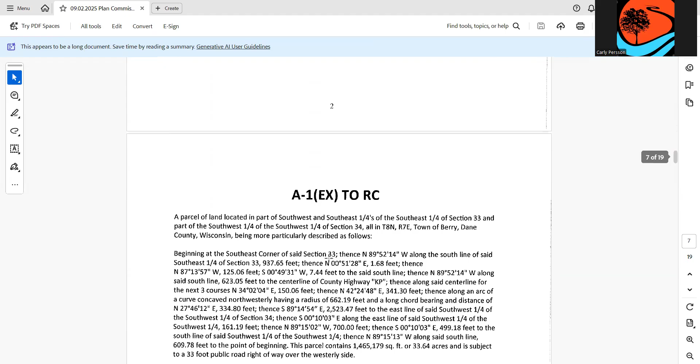Second item: discussion and possible action regarding certified survey map drafts, section 33 and 34, Town of Berry. Yep, I'll take this one.

So this is a CSM that falls into our extraterritorial jurisdiction. I'll show you a map that shows where it is in relation to the village. So basically what this is doing, John Brooks, a Town of Berry resident, is splitting off his home. He'll have 37.63 acres and is going to sell the remaining 33.64 acres to the Ice Age Trail Alliance. His parcels are on the northwest side of town for the most part. So right in here.

So these are the two parcels we're talking about. This is KP, and Shield Road is right here. I'll go back to the CSM itself. Basically he's looking to divide that into two different lots. This was already approved by the Town of Berry. So he's going to keep one of the lots with his house on it, and sell the remaining lot to the Ice Age Trail Alliance.

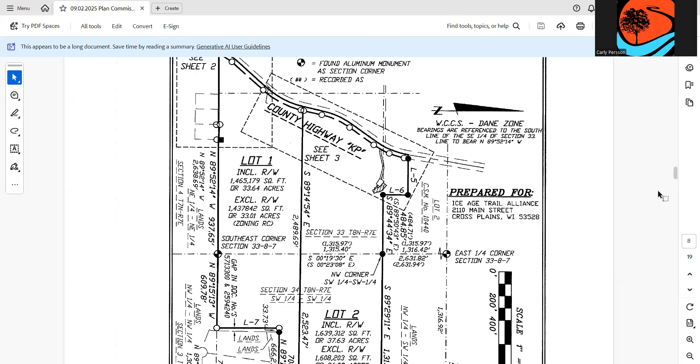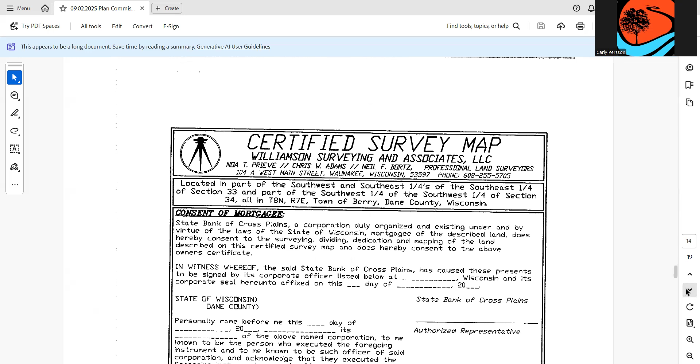All right, we're at discussion regarding Marchstone Water Tower / water reservoir. Why don't we have Brian and is it Kyle or Jeff want to come up?

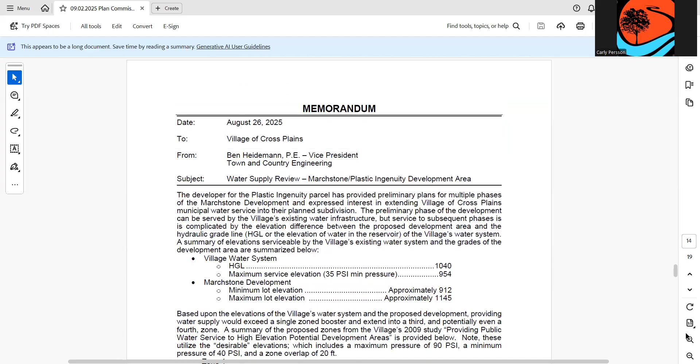Sure, just a lot. And then, chatting with developers, they had some questions, so we made up another summary cost sheet of some of the options I was talking about. This is a single page with some photographs of what the options could look like.

So, Jay, unless you tell me different, I think what I'll do is walk through the memo, kind of like we did the other day, and present some of the different options that are available to provide water service there. I'm going to try and keep it fairly high level.

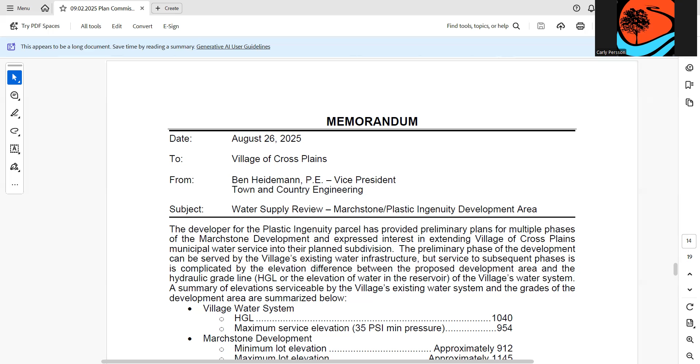Going through the memo briefly, right now the highest elevation you can serve is 954. So any house with a meter higher than 954 is going to be too close in elevation to that tank. The pressure won't be enough to meet code. You do have some homes in the northeast portion of the village that pre-existed that part of the code and have survived with not great pressure.

If they had a two-story house and tried to do two loads of laundry with a couple teenagers around, it'd be pretty tricky to get good pressure out of that shower head.

You can see the next set of figures is where Marchstone, the proposed development, exists. We're talking about the entire development, not just phase 1. For reference, phase 1 is well within your existing service area—that's the one recently approved at preliminary plat. But the next phases get close to 1145 feet above sea level, well in excess of your current system's ability to serve it.

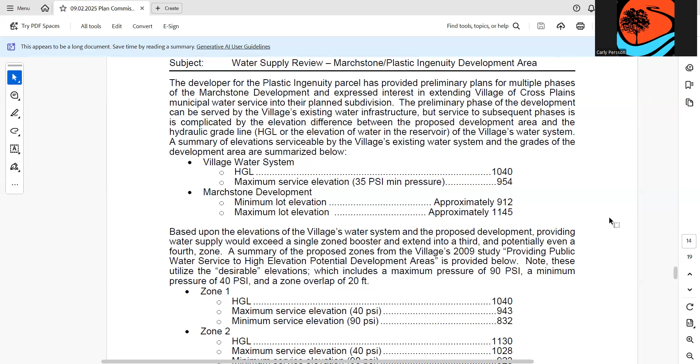The other item we noted when looking at options to serve Marchstone specifically were that, in addition to your zone 1, we'll call it your current zone, there's a decent amount of hillside itself, just literally the sides of hills, that takes up a good portion of what we would describe as zone 2.

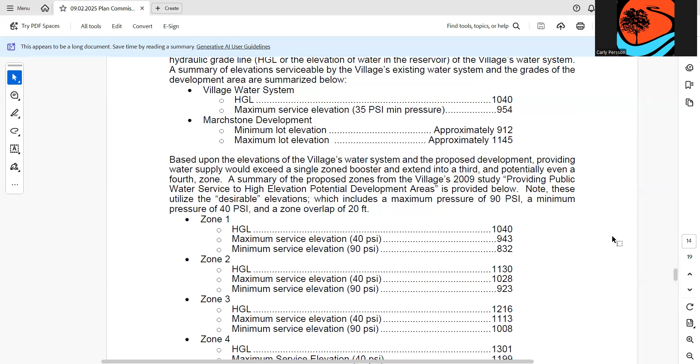When laying out water systems, we prefer a blank slate. We would prefer that zone 1 would be connected to zone 2, and then if you got complaints about low pressure in one zone, you can just turn some valves and now they're on zone 2, and they got really good pressure. They could share reservoirs. They would each have a source of water.

The issue at hand tonight is similar to what some of you may recall from the Sundance property, in that the homes at the very top are so high up. We kind of started looking at, do we want to skip a zone? There's some value skipping a zone or overlapping 2 zones because of the unlikelihood that a lot of houses would be needed in that hillside zone.

So you got the valley, the hillsides themselves, and then at the top would be the 3rd zone, and then at the very tippy top would be a fourth.

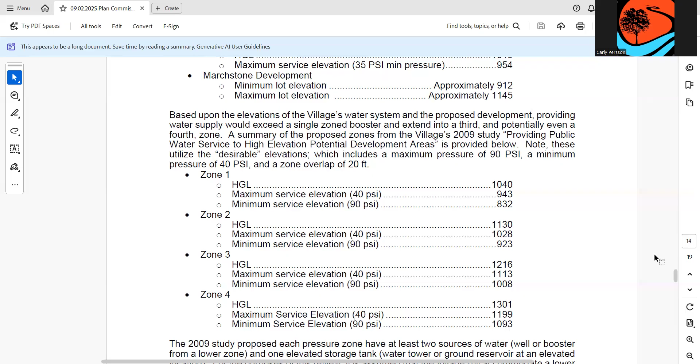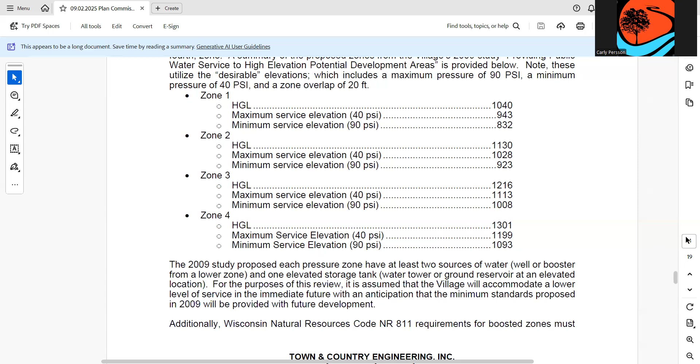The old studies and the old discussions with this group or with the board often centered around a couple ground rules that we would always recommend, and that's the last paragraph on the screen right now, is that ideally, each zone would have 2 sources of water and 1 tank. That gets fairly expensive, and that is not a code requirement.

It's something that engineers worry about is, if a disaster and another disaster happens in 2 consecutive days, getting water to and from those zones could be tricky, but it's not code.

So for this memo, we assume that the immediate need would be to serve Marchstone, and that some future need may get the village to a point where you have enough houses on the separate zone that the community would want to bring in that second source of water.

So when we say need, we're trying to use the word need to mean that's what code requires. Recommend is something at some point in the future, when the community feels like there's enough houses - and the definition of enough is subjective - but enough houses that you want to have a second source of water up there, you could do that once your system has grown.

As with any quantum leap, like a booster station for water or a sewage pumping station for sewer, that first home, you still need the same stuff, whether it's 1 home or 100 homes. And the trick from the developer standpoint, from the community standpoint, is to balance that so that first house doesn't need to cost $1 million.

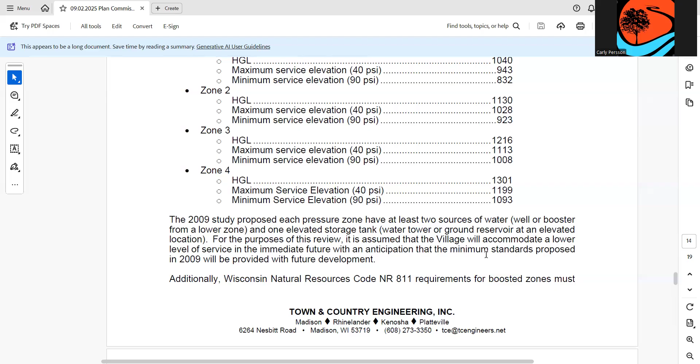Load the infrastructure. So with that, we looked at a good half dozen of options relative to the code, which I won't bore you with at the moment. There are some overlapping sections of code, so you fairly quickly end up with kind of a tic-tac-toe board of matrices that gives you a bunch of options. And we've distilled that down into about 2.5 options for the village and developer to consider.

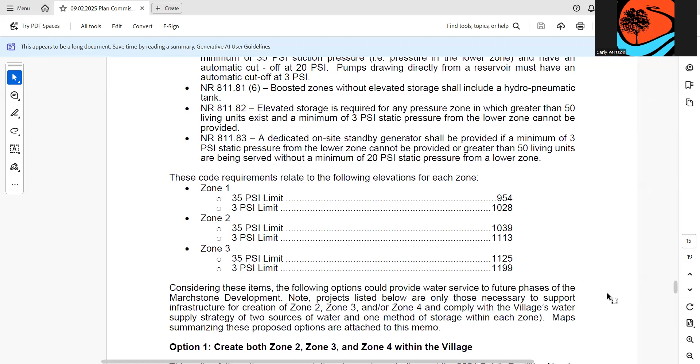Now I'll go into those. Option 1 would be a straight up do zone 2. You've already got zone 1. You'll see that second zone, a third zone, and a fourth zone, to cover all of these potential elevations.

That bulleted list and top option on my single page handout is what would be required. So you'd be looking at a booster station, which is a little house, a small building, a large ground reservoir, another booster station to go from zone 2 to 3. Then an elevated tower - this is a ball on a stick tower - with yet another booster station to go from zone 3 to 4.

And if money was infinite and there were no other considerations, this would be the most technically robust and most future flexibility to provide to a community. It also comes with a fairly heavy price tag - in very, very rough numbers, about $13.5 million.

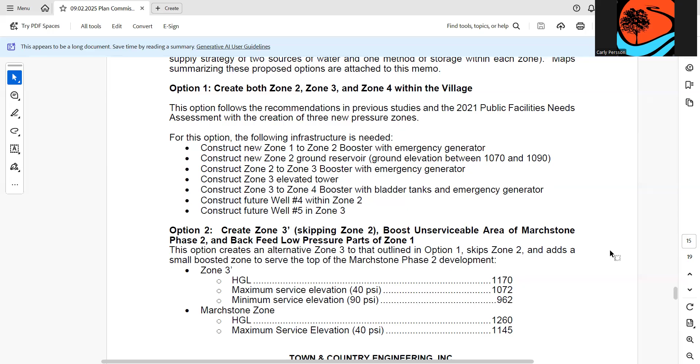The second option would be to look at skipping zone 2. And again, zone 2 would - in a community that just got gentle hills - make a lot of sense to have a zone two, but here, because your hills are so steep, and at the edge of your zone one, there's not a lot of developable land. In those, you do have your hillside regulation requirements. So skipping zone two, you went straight to zone three.

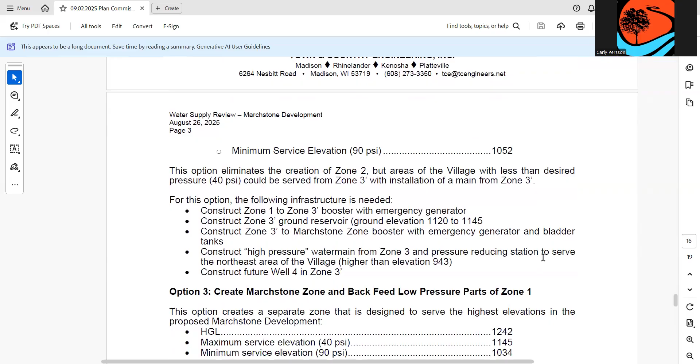That would involve a bit less infrastructure. We'd be back to 2 booster stations. That's one from your current village system to get up to the top of the hill, essentially, and to fill a ground reservoir near the top of the hill, so very similar to what you have now. And that second booster station to feed the homes that are right on that same level as the ground reservoir.

We want to be able to provide a solid 35 PSI at ground level, which ends up being 40 PSI in the basement, and allows you to take a shower on the second floor while having water, just for gross purposes.

The nice things about that option are slightly less cost. It does have a ground reservoir which matches what we have now. Some folks may not even know we have 2 of them in town.

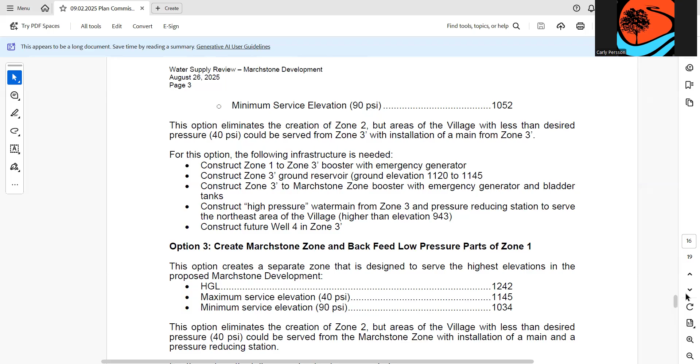The third one would be somewhat less costly, and the way we save costs there would be to eliminate that second booster station. So instead of a ground reservoir with pumps right next to it to provide that pressure to get to the second floor of houses, you can go with a traditional elevated tank, a sphere on a stick, a ball on a stick.

That would also be at the top elevation, but it would be tall enough to create that elevation difference from the ball of water to the second floor of a house, to provide that pressure.

That is slightly less dependent on electricity, and once the water's been pumped up, those are sized to provide at least 1 day's heavy maximum day use for that service area.

In all of these cases, the reservoirs would be initially sized to handle the immediate needs, Marchstone, and then upsized to handle both any potential growth they may want to accommodate, as well as some existing needs within your current system.

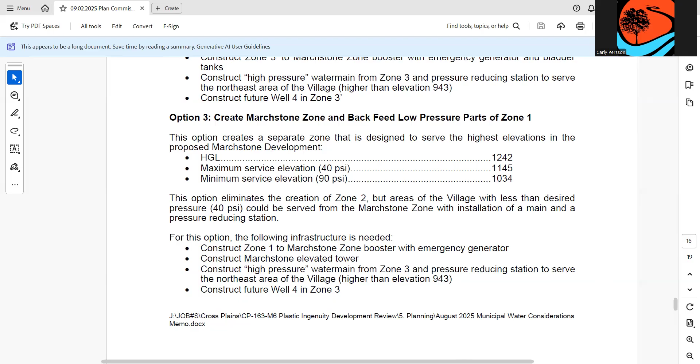The other item I should call out while we're looking at the asterisks says includes high pressure water main. Like, go back, or go down we should say, to the big map. Either this way?

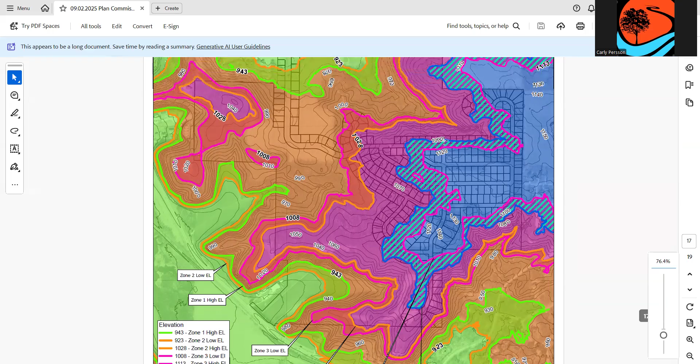Some of you may have recalled that one of the comments on the preliminary plat was that the village should request of the developer, which he's provided, an easement along the edge of phase 1. That's specifically to allow the village, as a convenience, to run a water pipe, a special dedicated water pipe from the blue/purple area across the yellow-green area to the north of Airport Road to give better pressure to those folks on Airport Road that don't quite have it now. So those costs are embedded in what you see here. Those have not been viewed as a developer thing because it just helps the current situation.

That's that single star, I think that was one of my questions, they should just answer. So I have friends on King Arthur Court, and they have to get their own booster half the time because of that. So if we discuss that, would it eliminate that, would they not need it anymore, correct?

What Julie's referring to is, if anyone's ever lived out of town where you got a well, a pressure tank in the basement, that's how those homes have a second floor tower. They have a pressure booster in the basement, that's kind of what they look like, a little bigger. So they're not unheard of, but it's another thing to have. A lot of folks in that neighborhood have chosen to just install one so they can overcome some of those pressure deficiencies just for normal daily use.

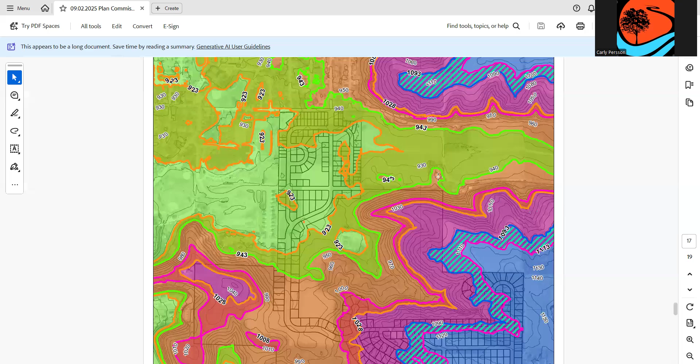So again, the option that skips zone 2 - just looking at it, very flat here, there's 15 lots or so that show up in zone 2. And that's what the clubhouse would be as well, and everything there. Certainly potentially, yeah, those folks would either need that type of private booster in their basements. Alternatively, the clubhouse, as an example, because there would be a storage source up above, can utilize the pressure reducing valve - get the water from the same spot, you just reduce the pressure on purpose right before entry.

Can you install something like that in individual homes as well, pressure reducing? Oh yes, absolutely - that's fairly common.

This is off the wall, but if you had to just guess, option 1 versus option 2, how many more years do you think it buys us? If we went with option one, would we ever have to do something more - versus if we went with option two? Do you think if we went with option two, within 5 years we'd have to do more anyways, or to get us to 10 years - or will option one get us to 10 years? Do you have a guess?

What's the damn good guess? I don't know that - you'd get to a point where you need that at 10. I'll admit that's just from what I've observed of the community in my 15 years or so working with you all. That's a lot of growth.

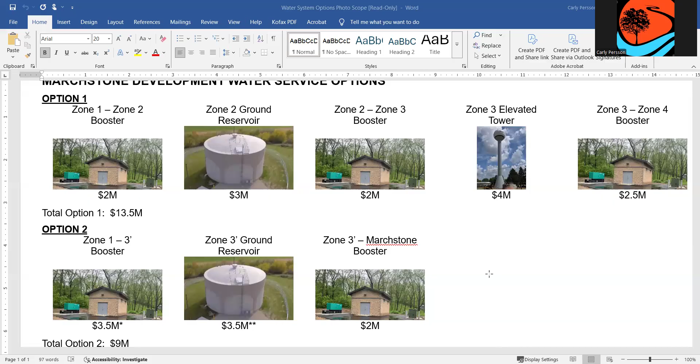I just think it would be hard to make our money back on that 6.5 million. You just don't know if there's enough growth at that elevation.

Brian, can you ask me a question? Sure. Well, if I take option 1, and I've got the same argument later - but if you looked at the last 2 items, 6.5 million from 13.5 equals 7 million. Right? If you just took that 6, after that it's 7 million. Why isn't this 7 million? Why isn't option 2 7 million with the same pieces?

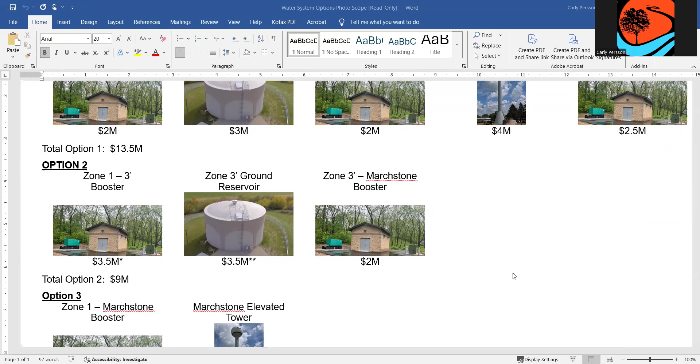Because option - this one, he's pointing to option 1 - I'll put it here. Okay. Option one provides continuous service all the way up to and including the top. Okay, this is Option one, two.

You'll notice this booster is more expensive than this booster. Yeah, okay. And that's because we need to boost further, so the finances reflect that. Yeah.

And to be fair, I like to overstress - these are like plus or minus $250,000, and I know I shouldn't be playing with $250,000, but there's a ton of options and choices to be made. That answers that - that's a good question.

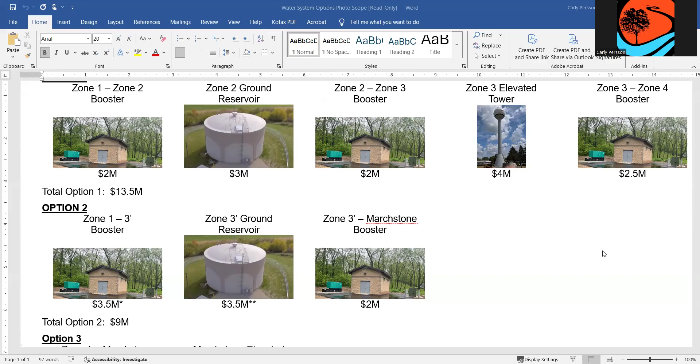To me, it seems like it's about costs and aesthetics - well, maybe that's this committee's perspective or my perspective. The aesthetics of the elevated tower is the issue.

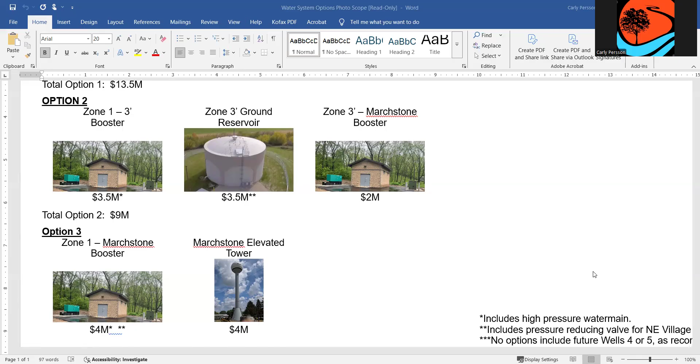What was the intent tonight, to look at options for approval? No, we're not looking for action tonight. This is to educate you guys and get your input on the situation. That's for the planning board and everybody else to discuss the findings. So it's more about seeing these three options, or is there another option you're thinking about, and looking at the pluses and minuses to get a feel for where you guys are on how you'd like to see the water part of it develop.

Jay, with all due respect, we're probably already a month or two behind. So I think the intent of this meeting was to get a little bit of clarity. That was my understanding.

Sure, we can - but when you say clarity, clarity of what? Well, I guess in our perfect world, the commission would basically make a recommendation that would be either option 2 or 3, if possible. Now, I'm not trying to step in where I shouldn't be, but our timeline's super tight to get phase 2 done, and I think we're already behind schedule. So if this is gonna get pushed back...

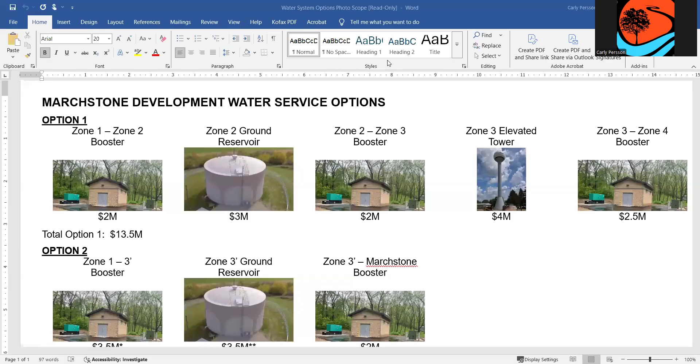So we played a little switcheroo with everyone that I should have called out - on option 3 you'll see that we refer to this thing called the Marchstone zone. We kind of stopped calling it zone 1 and zone 2, and with the Marchstone - what we're getting at there is, instead of being constricted to just zone 1 or 2 or 3 or 4, this looks at it a little more specifically at Marchstone - the task is to serve Marchstone in the most effective way.

We create this new zone that kind of straddles some of 2 and some of 3 - actually, some of 4 and some of 3 - and we just make it the Marchstone zone. We declare, because of that phenomenon where you've got cross valleys anyway, what are we gaining by hitting a classic zone 3 that's been talked about for the last 30, 40 years? So that's kind of the flexibility you give up a little - it brings that zone of service down to best fit there.

And there is some overlap - these lands here still benefit, the township lands to the east, those houses all still benefit. It's just more specifically laser-focused on the development, and for the million more, you feel like we actually do provide a much bigger service.